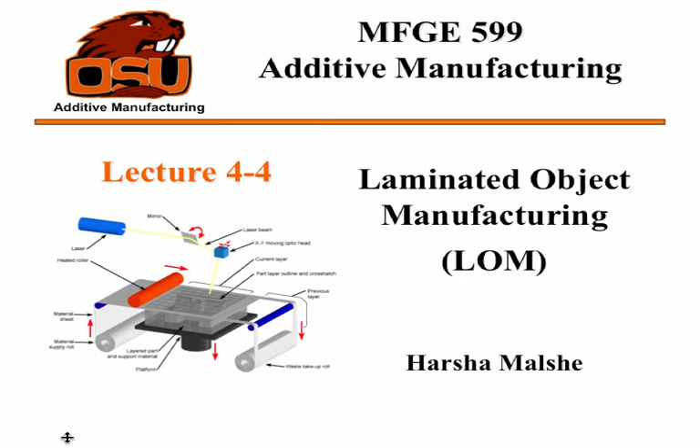So basically, LOM is a process that combines additive and subtractive, because although you're still building materials layer by layer, there's a lot of removal of the excess material, and actually you can't build any internal cavities because of that. So that's a real issue with this process. But again, the layers, the material are in forms of sheets, and they're bonded together by applying pressure, heat, and then there's an adhesive coating applied to the material sheets as well.

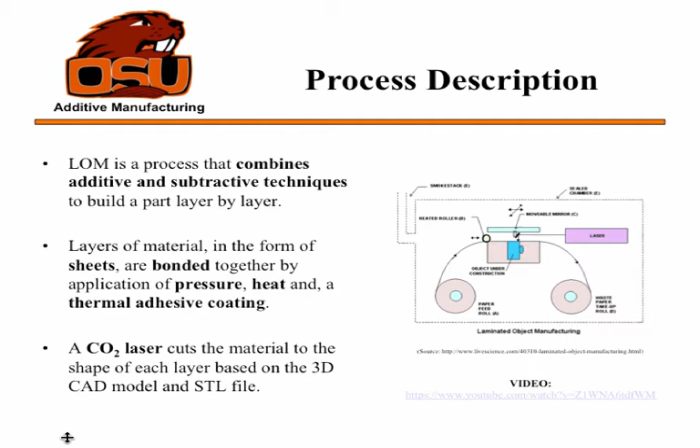And a CO2 laser is applied to trace that layer out, and then again the platform moves down, the roller moves across. So number one, you see the material pulled across the platform. There's a heated roller that activates the adhesive on the material and it bonds it to the substrate or the layer below. The laser cuts the material into the pattern of that single individual layer. There are cross hatches made in the material if that material is not actually part of that component to help remove it later. So a single layer is formed.

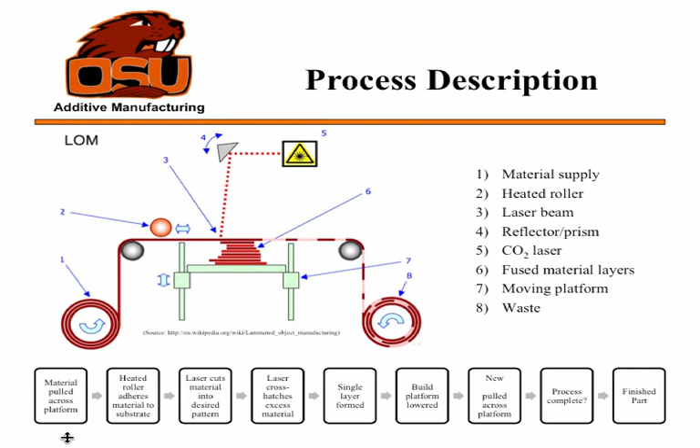The build platform is lowered. New material is again pulled across the platform, and the process continues until the part is complete. And so, as you can see, the different parts here of the actual system, there's a lot of waste generated actually. So, unlike most additive processes where you're able to selectively place the material, you're going to create waste.

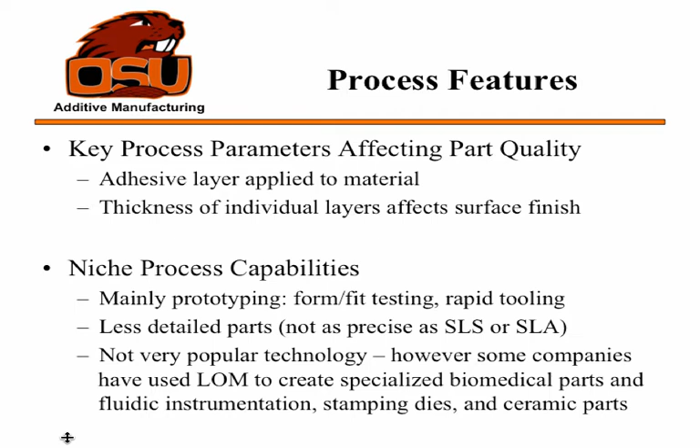Some key process parameters include the adhesive layer, how strong that is, whether there's going to be any pockets or voids created between the layers itself, and also the thickness of the individual layers. So it doesn't make parts that are very precise or have great finishes like SLS or SLA, but it's going to be low cost. Again, this is not a very popular process, but it's used mainly for prototyping. Less detailed parts, but there's a new company out of Ireland that I'll talk about later that's been using this technology to do some interesting things.

So some of the advantages: low cost, no post-processing, no supporting structures. I guess that's what I meant by post-processing, but there is post-processing. You have to remove the excess material. No deformation or phase change, so a lot of good capabilities in terms of keeping the material properties the same. And then again, potential to build larger parts. The current processes are limited by build volumes that are typically small.

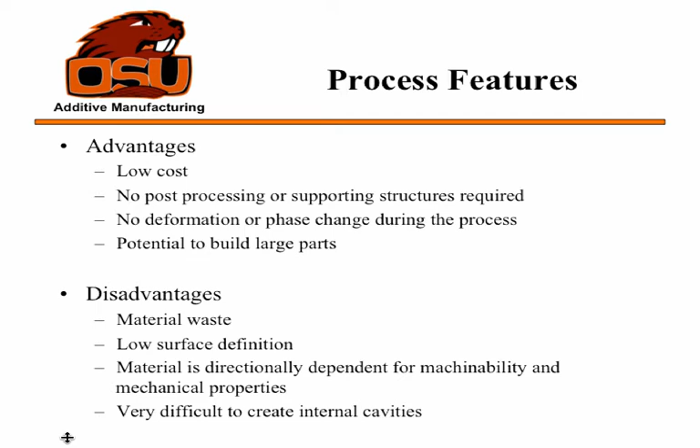But then again, the disadvantages include material waste. Again, the surface definition is an issue. And again, the material is directionally dependent. And like I said, you can't create any internal cavities.

Some of the materials used: thermoplastics. Paper is actually the most common, like printer paper you could pull out of your computer there. Composites. Now, ferrous metals, non-ferrous metals, and ceramics are included. However, I found no supporting evidence of that anywhere. There's probably research ongoing about metal, and I think that would be an interesting case for our MBI center here, but I did not find any support for that.

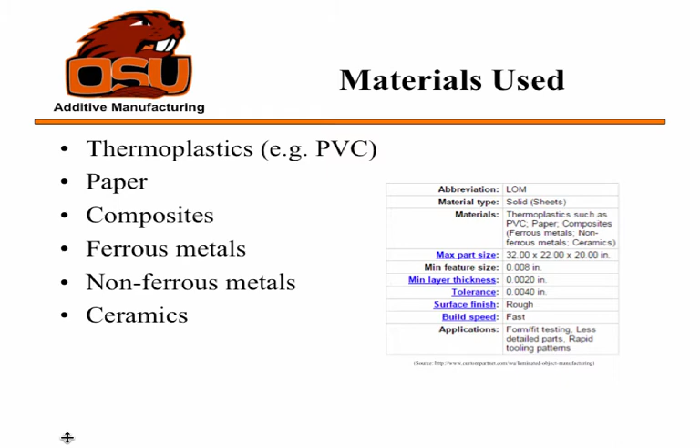So looking at a case study here, this is a model of a partial human skull, a geometric toy, and then that's Voldemort. And so it's mainly used for art, like I said, to create prototypes. One of the coolest things, though, as you can see, is you get a high definition of color, very vibrant color you're not usually able to get from other types of 3D printing. Again, it's made through normal paper. You take out your printer. This is from a company named Mcor from Ireland. Low cost, relatively fast, and again, post-processing flexibility. So a good process if you're really just into prototyping and art right now.

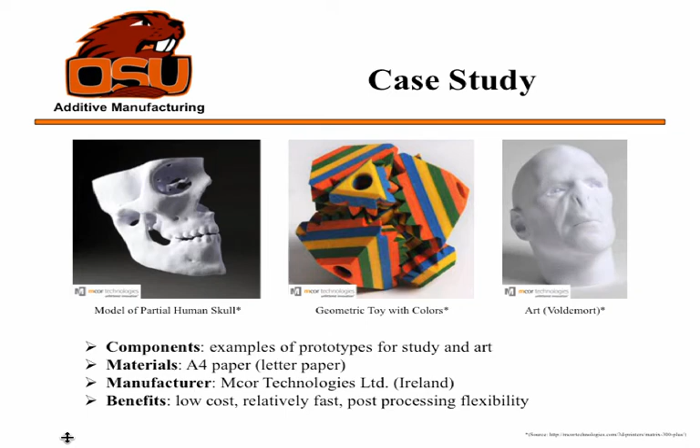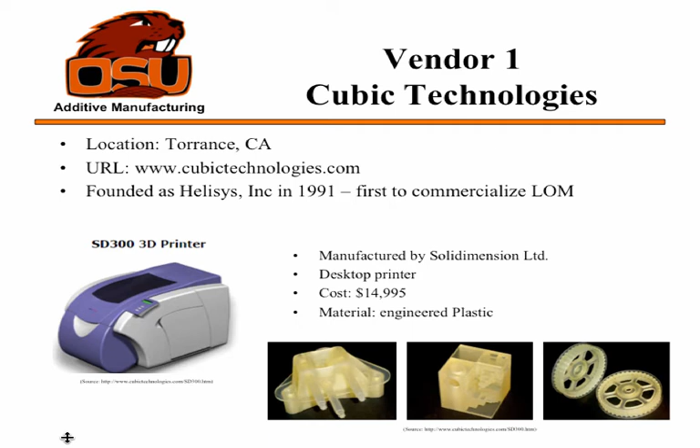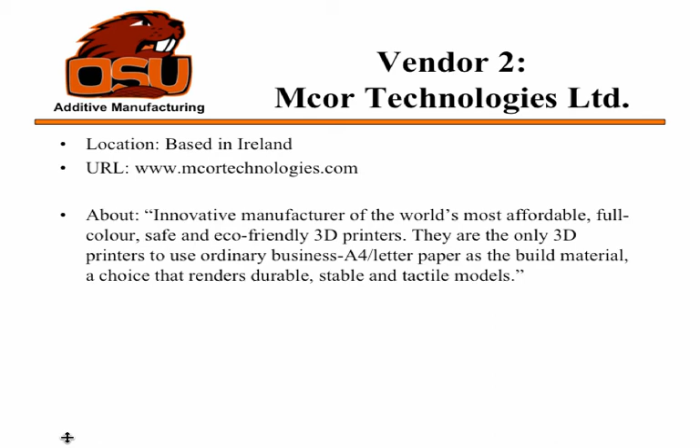Second vendor I talked about, Mcor Technologies. They're based in Ireland. They took this technology and they applied their own innovative twist on it to help lower the cost of the actual printer. And they've created another type of technology called SDL, selective deposition lamination. So like I said, the adhesive is applied to the entire material layer, but in this case, it would just be selectively applied. So you could probably have better control on the shape geometry.

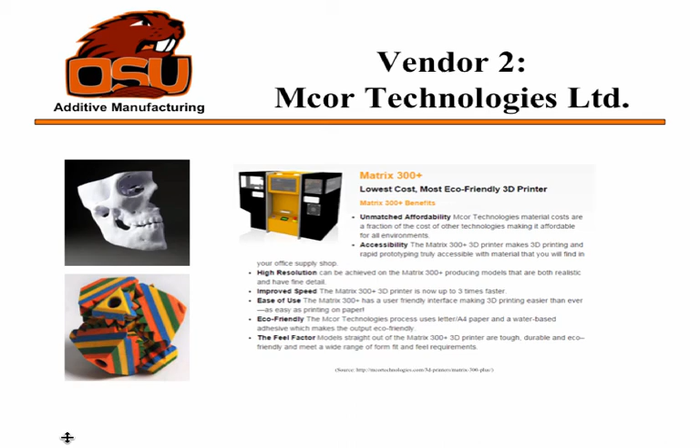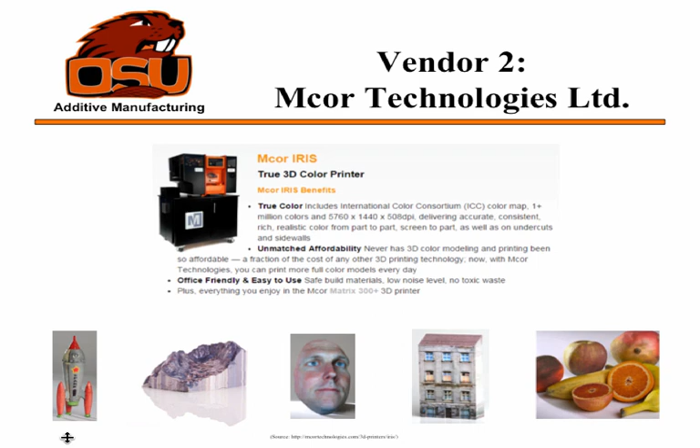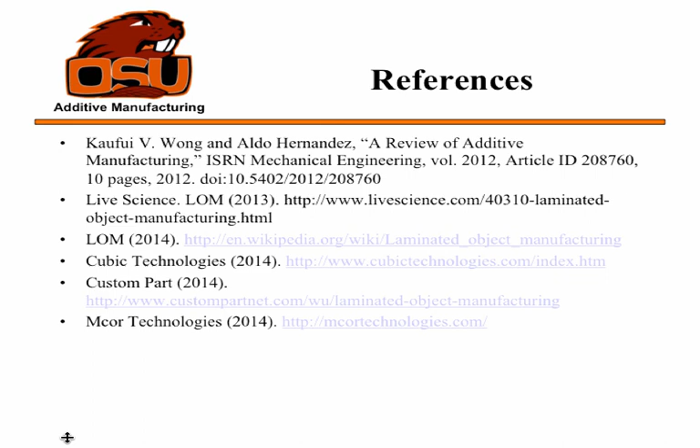And these are my references. But again, this technology is not very popular, but right now Mcor is actually partnering with Staples. Staples has something called Experience Center, and they're actually allowing the public to come in, experience 3D printing technology through this company, and print their own color versions of different things, a little bit of art. So I think this is a way to reach out to the public again, and hopefully there's a lot more applications to be thought of.